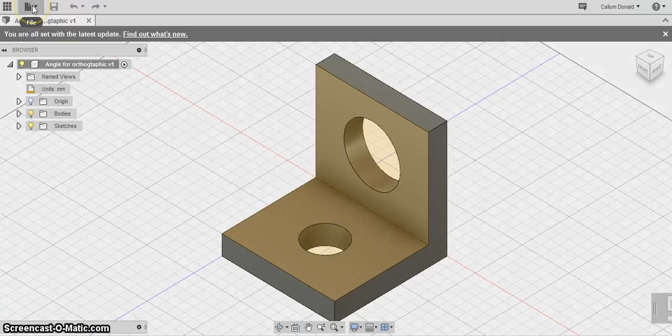Okay, so I'm going to talk about how to make an orthographic using Fusion. This is the drawing that I'm going to use, and it's off of one of the tasks, I believe. So you can just click on File, New Drawing from Design.

Once you do that, a box comes up, and you can say ISO or ASME. It doesn't really matter, there's not much difference between them. You want to do it in millimeters, and it's going to be an A3 page.

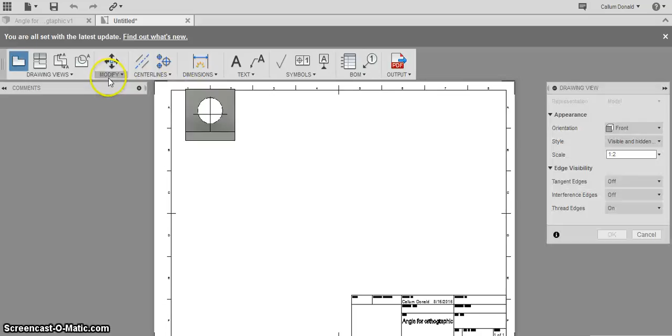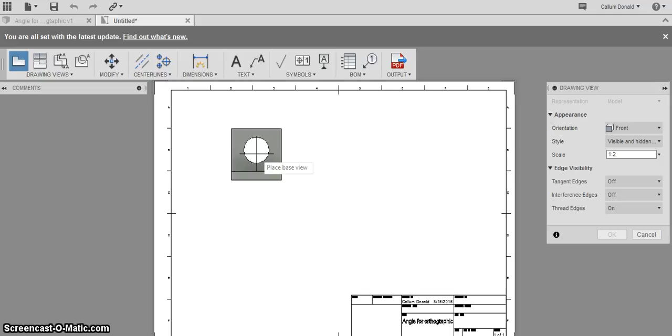So if you've got this, okay. When you first load in, you're going to get the base one. This will be the one that all the drawings are based off of, and this is always the front view of your drawing. So remember when you're drawing it to make the orientation right, otherwise when you get to doing an orthographic, it might end up facing the wrong way. Just click where you want that to go, and that's it.

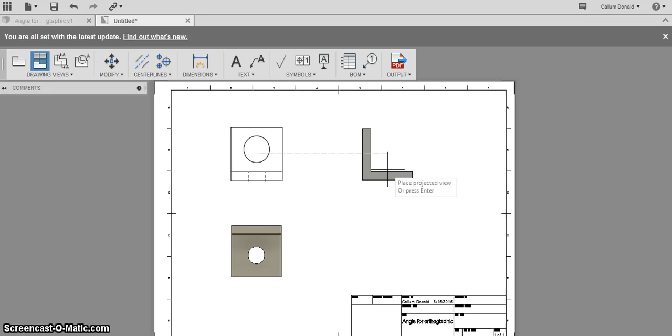In an orthographic, of course, you don't just have one drawing of it, otherwise you wouldn't be able to do much with that. So what you can do is click on this one, which is Projected View. Click on that, and then click on the model, and it will show you different viewpoints of it. Just drag away from that one, click to place one, and as you go around it'll show more. There's only 8 points of view you can do, and I'm only going to do 3, so click there, then once you're done, just click back on that.

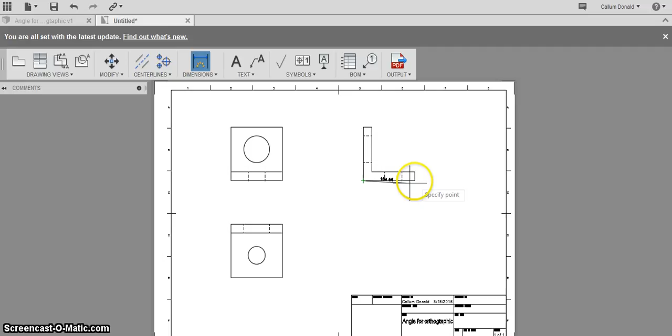Another good thing about doing this on Fusion is if you click on Dimensions, then click on one of the corners and click on another point, you can get the measurement of the side - you can see that's 120. You don't have to just do those ones, you can also measure the width of the hole that you've made here with 2 points, then just drag it up so it's easier to see.

So on Fusion it is good because everything's a lot quicker, it just makes it a lot easier.

If you want to add text to the orthographic, there's a little text box up here, and you just click that, and if you want to fill anything in, just click - it's like Word where you draw the text box and then write anything you want in there.

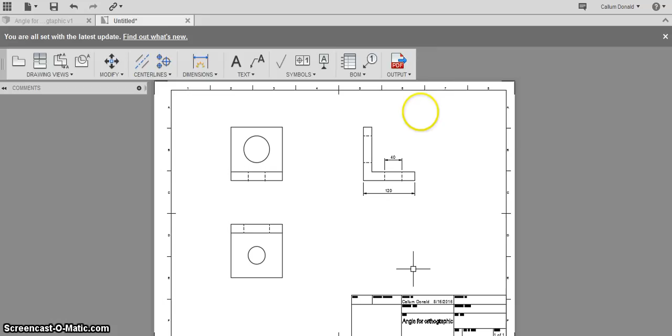It's a lot better than drawing them by hand, because drawing by hand they could get damaged or you could lose them, and it's also a lot more time consuming because you have to draw each viewpoint individually, based off things you would have made on the computer. Fusion just makes it a lot easier because everything stays on the computer - you can store it somewhere else, and it'll be safe from harm, so you won't lose it as easily.

Other people may be able to edit it if you send them the project and the orthographic, and you can just print it off at any time, and if you lose that one you can just get another. So thank you for listening - that's how you make an orthographic on Fusion, and why I think it's better than drawing by hand.

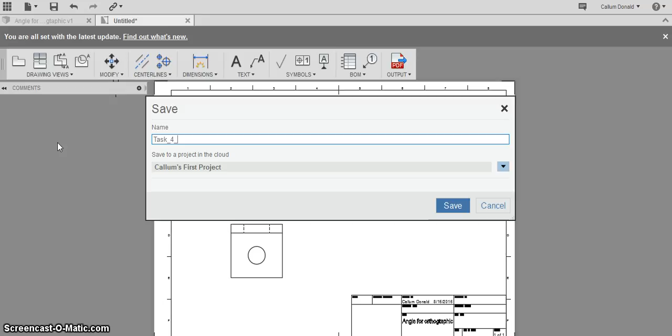Almost forgot, if you want to save it, it's the same as most other projects - you just click File, Save. I'm just going to call this task... yeah, sorry, I'm not very good at spelling. Save, and then you've got that.

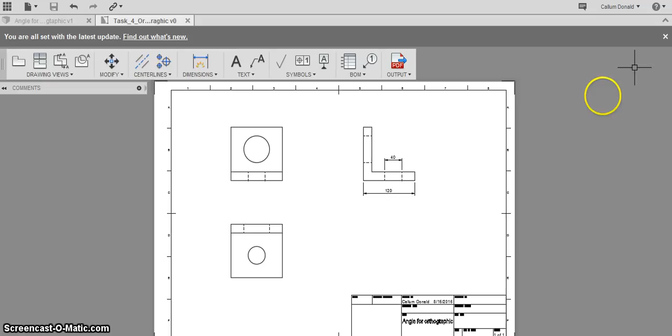I haven't really worried about backups, because Fusion saves to the cloud, not to your laptop. So even if your laptop or computer gets damaged and the hard drive is destroyed, Fusion will be safe.